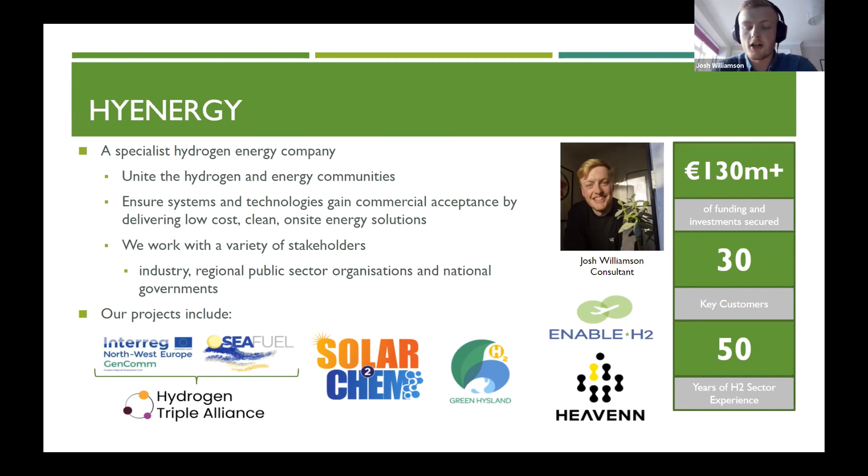So firstly, a little bit about myself and the company. HyEnergy are a hydrogen consultancy specialising in linking the energy community and the hydrogen communities together. We've worked with a large variety of stakeholders, right the way through from SMEs to large industry bodies and national governments too. We've got experience with a number of hydrogen technologies across the value chain, particularly around electrolysis, storage and distribution. Personally, much of my focus is on our collaborative European projects, including various hydrogen production pathways, looking at solar-to-hydrogen, wind-to-hydrogen, etc., as well as hydrogen valley style projects, whether that be HEAVENN and Green Hysland, which we helped to write and design as well. Here's a little bit about our activities - you can look at them later on. I'll share the slides, so if you're interested, you can have a look.

So firstly, looking towards the EU, just to help build the context around the UK's decisions. The EU have been clean energy pioneers for a number of years now. They've helped to deploy a large number of renewables in order to decarbonise the electricity system, and as you can see from that 24% reduction in emissions compared to 1990 levels, they're now looking, instead of an electron focus, towards more of a molecule focus, as they realize that more things need to be decarbonized than just our electricity systems. In the wake of the COVID-19 pandemic, what we've been focusing on really is moving green growth away from electrons and towards hydrogen and other molecules.

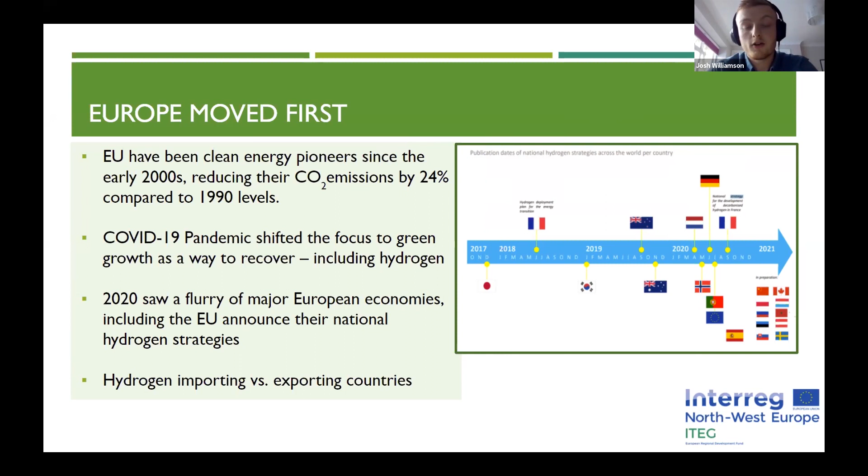The EU saw this as a real opportunity for clean growth, and that's why in 2020 we saw a number of major European economies announcing hydrogen strategies, whether that be hydrogen importing strategies, where their demand outscaled their potential creation of hydrogen, or exporting countries, where their creation exceeded their demand. So where does that leave the UK?

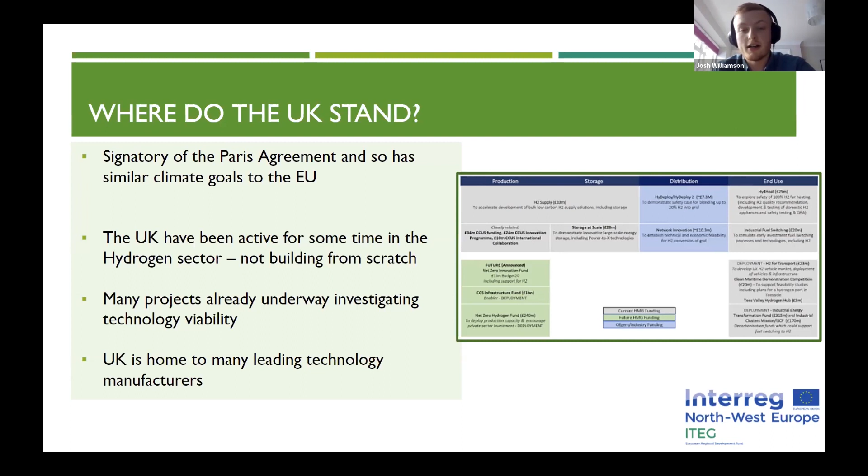Well, the UK are still signatories of the Paris Agreement. They were members of the EU until recently, so naturally the two's climate goals are relatively similarly aligned. And in terms of hydrogen, they're not building from scratch. The UK have had a number of successes in the hydrogen area, and they've got a number of leading technology manufacturers, as well as collaborative projects already underway.

For example, we've got HyDeploy, HyFlyer, and the London fuel cell buses. These are projects that have pioneered hydrogen aviation, hydrogen gas grid blending, and mobility, right the way back to the mid-2000s in the case of the fuel cell buses.

We've got leading technology manufacturers. ITM Power, one of the leading electrolysis companies in the world right now, and they've just opened their Gigafactory, which is the largest production facility in the world for electrolyzers.

Ceres are solid oxide fuel cell manufacturers, and they're the premier name within that, partnering with people like AVL, a global company, to help maintain their position at the front of the line. We've also got a number of sector bodies - three associations that help advise on policy, disseminate knowledge, and create regulations to make the hydrogen market a success in the UK.

So we've got this big picture building within the sector, and the UK is in a good position at the moment. But where does that leave us in terms of formal announcements? We knew the EU were announcing strategies in mid-2020, but we had to wait a little bit, and we haven't quite got our hydrogen strategy yet at this point.

In November 2020, we got the 10-point plan for a green industrial revolution, which came with a range of environmental targets, and it's where the UK have really tried to zero in on their zero emission technologies. It has a number of targets that are key to hydrogen.

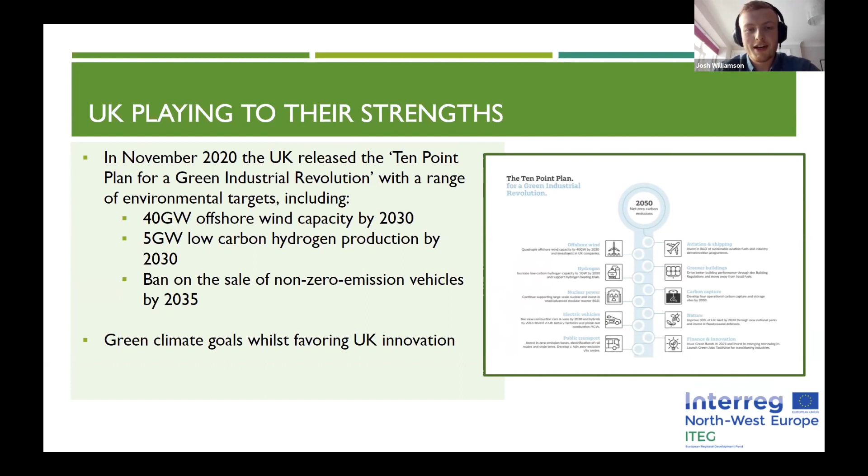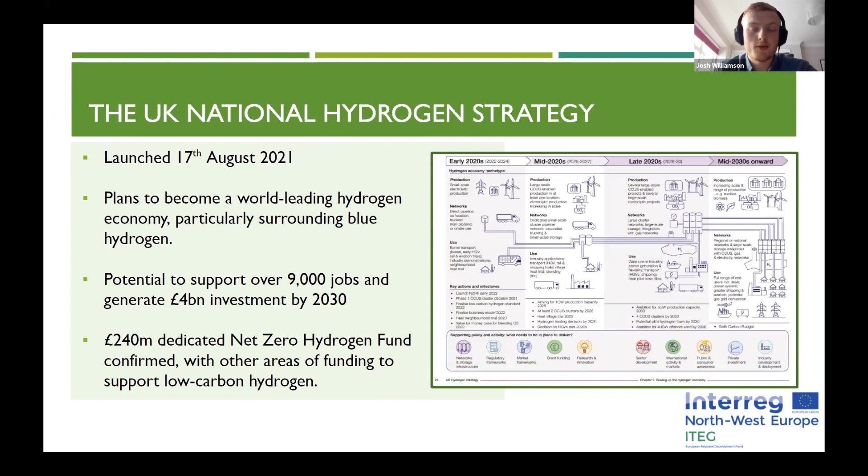Moving on to this year, we were hoping for the swift release of the UK National Hydrogen Strategy, and unfortunately we thought we'd get it in early summer, but we had to wait until August. But beggars can't be choosers. So we got this document which shows a roadmap for the development of a low and zero carbon hydrogen strategy within the UK, and it's split into three main sections.

The first is the role of hydrogen within the UK, which will primarily be used in two areas: to offset the use of natural gas, and to prevent the use of grey hydrogen, changing it for blue or even green. The UK predict this will end up in a 20 to 35% final energy position as we ramp up to 2050, with a large amount of carbon savings too.

Within the strategy, there's still a focus on blue hydrogen production - that is grey hydrogen where the carbon is captured - and the target is still 5 gigawatts, which didn't change from the 10-point plan. And finally, we're still focusing on UK innovation rather than importing.

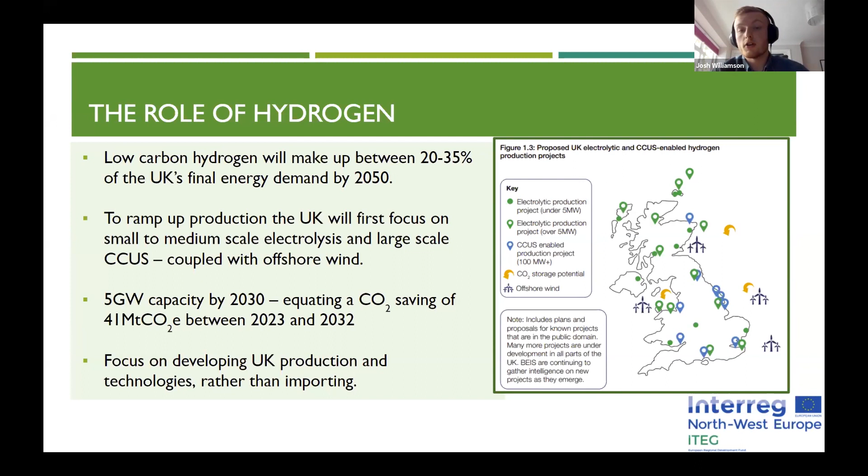There's this position where globally a hydrogen market will open up as this importing-exporting position starts to develop. The UK recognise they're not going to be able to rely on importing solely, so they want to build a strong UK position before potentially exporting their own technologies and expertise overseas into international markets. The second section, which is really pivotal, is the hydrogen value chain. In terms of production, the UK are going to focus on a twin track approach.

That means that blue hydrogen production will take the brunt of this force, at least initially, whilst electrolysis will be seen as suitable for much smaller deployments and isolated areas before it starts to take on a bigger responsibility within the industry as the technology becomes more mature.

Whether it's blue, green, or grey hydrogen, storage and distribution mechanisms are going to be pivotal to deal with this increase in demand and production. We're going to need even greater storage containers that can be manifolded into larger tube trailers, big hydrogen pipelines to transport large amounts of hydrogen from creation centres to demand sites, and even waterbound transportation mechanisms of hydrogen. Industry and heating are going to be replacing grey hydrogen and natural gas, but mobility is also going to be really pivotal in the hydrogen space, particularly HGVs and heavier vehicles, where batteries perhaps don't have as many advantages as their hydrogen alternatives.

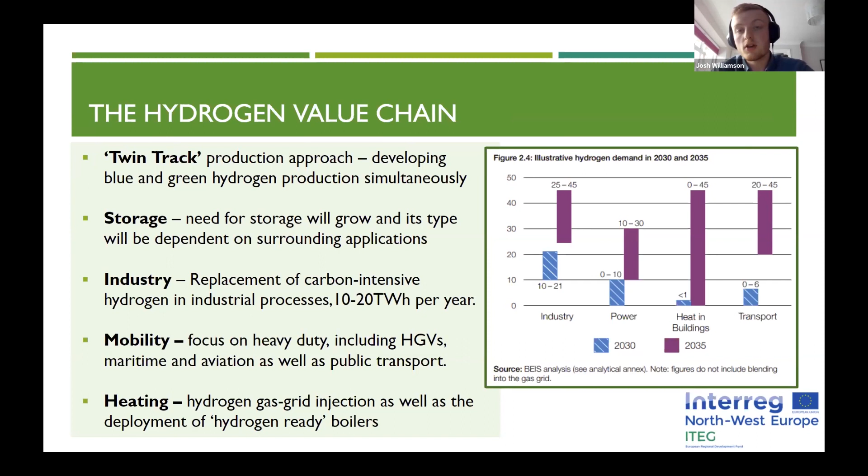The UK have already released a £120 million Zebra scheme to help replace buses with zero emission alternatives, roughly 4,000 buses. So that shows you where the UK are starting to position their mobility sector.

The final area I'm going to talk about from the hydrogen strategy is its value to the UK. In the wake of the COVID-19 pandemic, the UK needs areas for fast growth to help bounce back, and the low carbon economy is predicted to grow up to 4 times faster than the normal economy in the coming years. In terms of hydrogen, that could mean 9,000 jobs by 2030, rising to 100,000 direct jobs by 2050. We're likely to see a lot of that investment within the north of the country, in areas with industrial heartlands that have lacked investment since around the 1970s onwards.

In terms of how that support's going to be managed, there's a £1 billion net zero innovation portfolio, which will come complete with £240 million for a net zero hydrogen fund. There's also £1 billion for carbon capture technologies, and roughly £2 to £3 billion for car manufacturing, exploring their zero emission possibilities.

So that's building this whole picture where these industries will work together to pursue net zero solutions. We're going to have a full systems approach with industry, academia, and stakeholders working together to pioneer British business. And once that British business has matured enough, the UK will look towards its exportation possibilities in terms of expertise and technologies, not in terms of hydrogen export.

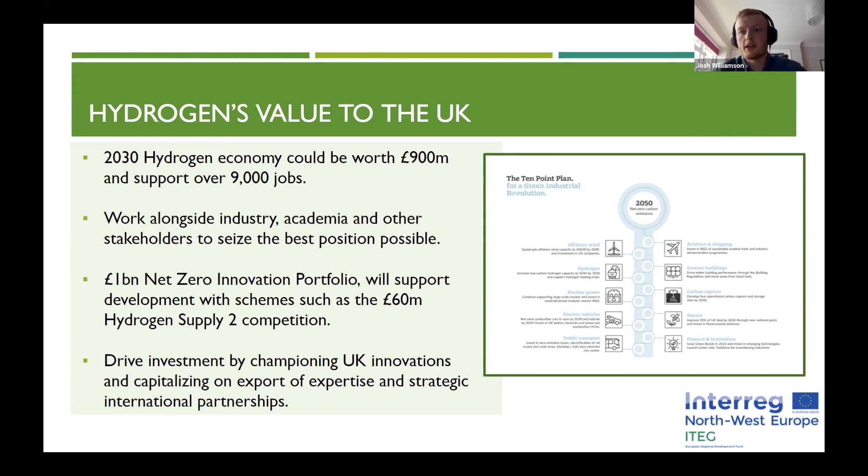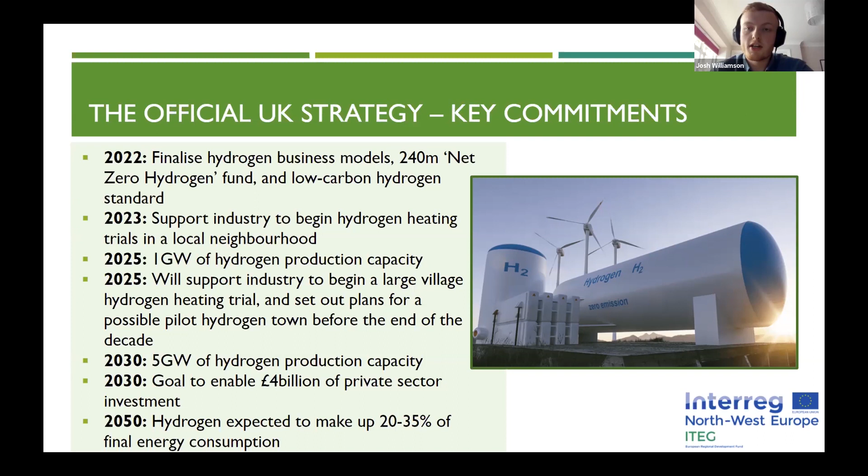So that all boils down to these key commitments. Get it right, and the UK's targets could seem rather minute in comparison to what's really possible for the country. But get it wrong, and the funding will be underutilized, and it could leave the country in a real predicament as to how to achieve their net zero emission goals. But for now, things are looking promising.

The UK have already done the legwork in a number of projects to establish these technologies and start scale-up activities, whether in industrial scenarios such as HyNet in this diagram, or demonstration projects. SGN's H100 is one such demonstration project where they're looking to heat people's homes with hydrogen, as well as their cooking, using 100% hydrogen from a pipeline.

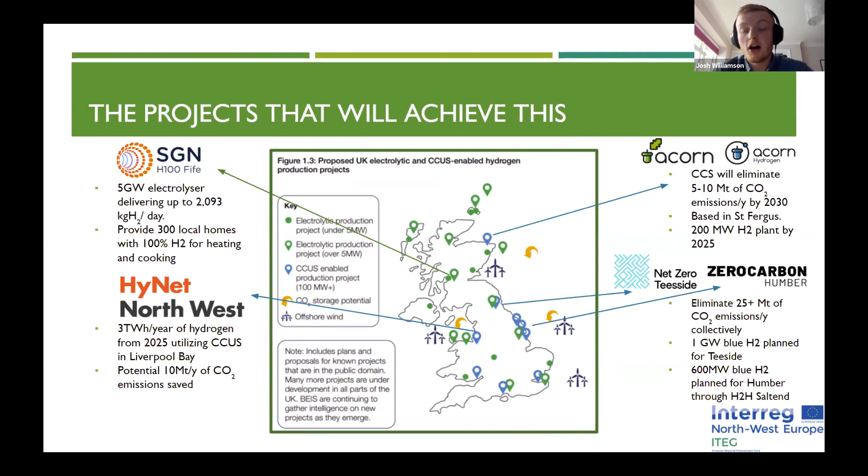These projects can be key not only for overcoming the technical challenges we see, but also for achieving public buy-in. If you ask the average person on the street what they think of hydrogen today, you're likely to still get the answer that it's something to do with being explosive, or the Hindenburg. These projects are really important in overcoming that point of view and achieving a higher penetration in public-facing areas.

So, whilst we're talking about the strategy, we also need to talk about its challenges. That high levelized cost of hydrogen is really the central challenge. A customer isn't going to be willing to pay more than their current grey hydrogen price because it will hamstring their profits, and who's going to want to do that?

What we really need to do, though, is not just take the position that we need to scale up and low carbon hydrogen will come down in price. It's really a mix of all these challenges together, and we need a coordinated set of measures which will tackle all of these in accordance, and that will lead to the central challenge being tackled. Scaling up is part of that challenge, but we need a coordinated set of measures.

In terms of marine for hydrogen, in the national strategy, there's not actually that much mentioned, unfortunately, aside from saying Scotland and Wales are great locations because of their marine potential. So I'm hoping that in the rest of this webinar, it will be a great opportunity for us to hear a little bit about the solutions that the tidal and the marine sector are creating in order to force the government's hand in that area a little bit, as we've seen a lot of support for solar and wind, etc. And it would be great to see the marine and the tidal area do the same.

Just quickly, if you're just getting started with hydrogen or you'd like to talk to some experts based on this presentation, I think that these two resources are a great place to start. The Hydrogen Territories Platform and the Community Hydrogen Forum are great areas where you can talk to these people and explore your potential as a community or a company.

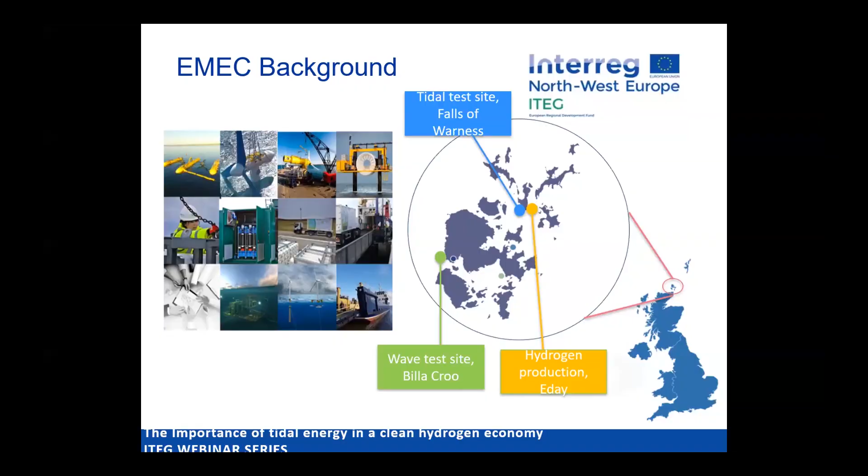So for those of you that don't know about EMEC, EMEC is the European Marine Energy Centre. It was established in 2003 as a not-for-profit business, and we're based in the Orkney Islands, which is get to John O'Groats and keep going. So, based on the north coast of Scotland with an abundance of natural resources such as wind, tidal and wave energy, and you can see there from the map EMEC's test sites.

So in the green is the wave test site, and the blue is where the tidal arrays will be established at the Falls of Warness, just off the island of Eday, where James will talk about the tidal turbine very shortly. And then the hydrogen production site, which is also based on Eday. Over the last 18 years, EMEC have had 34 marine devices deployed from 21 clients from 11 countries. So it's a really broad portfolio, as you can see from the picture there.

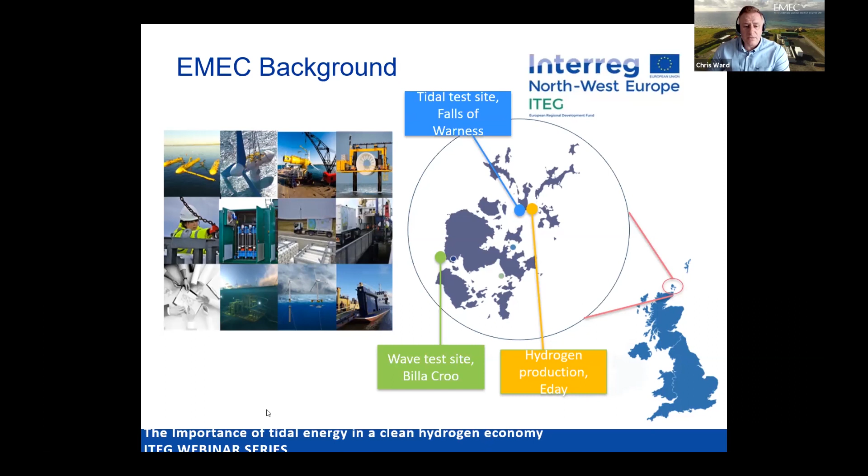So what is the ITEG project? The ITEG project is key to develop and validate an integrated tidal energy and hydrogen production solution for clean energy generation in remote areas, open market opportunities for the ocean energy sector through hydrogen production, optimize an EMS, an energy management system, and fast track a clean energy generation, management and storage solution towards commercialization.

And then our partners are working on building a roadmap to support replication of the integrated solution in other remote and grid restricted areas. So from the diagram there, you can see the Orbital O2 device, which is now deployed at the Falls of Warness EMEC test site on the Orkney Islands, the island of Eday, and then that's connected to the substation, and it will be connected also to an electrolyzer to produce green hydrogen.

And the way that that's stored, we have static storage on site up to 500 kilograms, but then you'll be thinking, how does it get off the islands? Well, we have specific bespoke tube trailers designed to carry hydrogen from and around the islands, and they can carry up to 250 kilograms of hydrogen to then be dispensed into the application that it is required for.

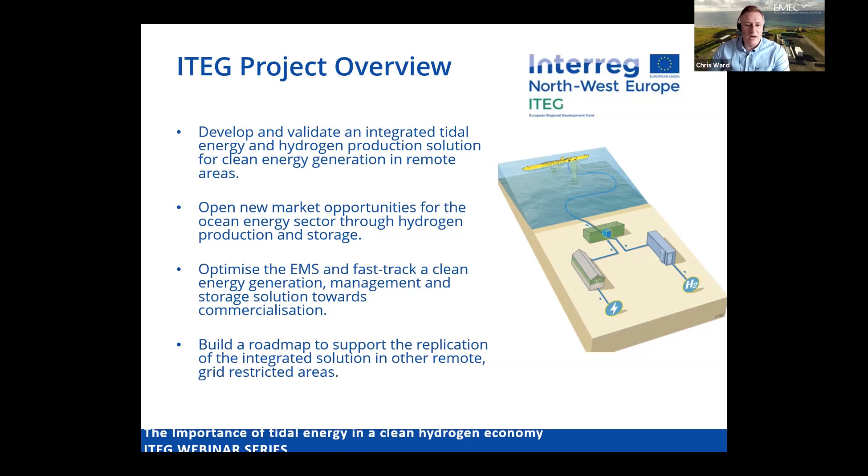And they're also connected to the Eday wind turbine, which is a 900 kilowatt wind turbine, which is also connected to the site as well. With all this information coming through the site, we'll have some great data analytics, be able to power green hydrogen from wind and tidal solutions, and then be able to store the curtailment either as hydrogen, but also in the form of battery as well.

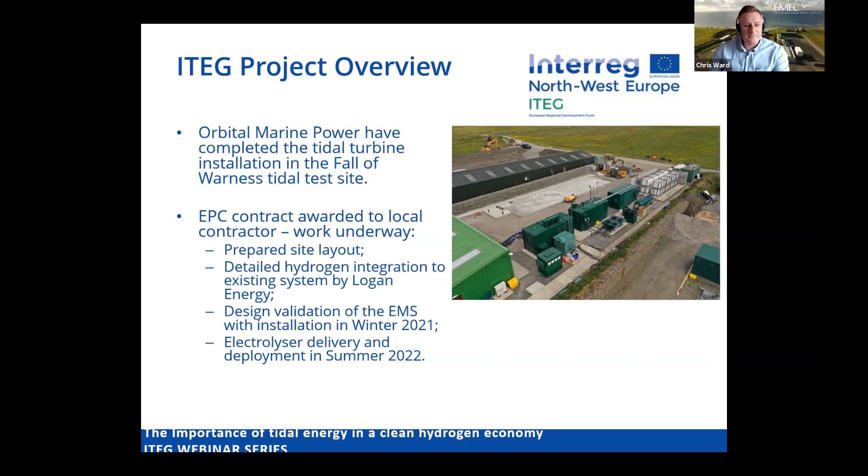As all of us have been affected by COVID-19. Nevertheless, on the ITEG project, all the partners have been working hard behind the scenes, obviously virtually, but also with some of the more challenging aspects, which probably James will allude to later, with regards to the actual physical build of items of equipment. So luckily, we have been able to work through this, but like all of us, everything's just slower, a bit more expensive, and that does hit the project, and we have to plan accordingly to mitigate these circumstances. So we have been suffering supply chain issues, resulting in delayed delivery of some of the project elements.

Obviously, when furloughed staff was an issue, we didn't have the contact and the person power to deliver deliverables on time. And manufacturing environments such as the shipyards had to be a safe working environment due to COVID, which has had to be taken into consideration as well. But we're working through these, and we have got a project extension until December 22.

So a large modification has gone in for the partners. There were no project funds allocated; it was just basically a time extension. So the partners had to work hard to make sure their budgets can align and still deliver the project to the new extension time and on budget as well, which has been very challenging.

And we all have been working remotely for the last 2 years as well. So as much as working online is fine and it's practical and it serves a purpose, it doesn't replace building up relationships with project partners, being able to have those over-the-desk conversations and being able to progress things in different elements, all progressing towards, as Josh alluded to earlier, all the different requirements which we're pushing these projects to achieve.

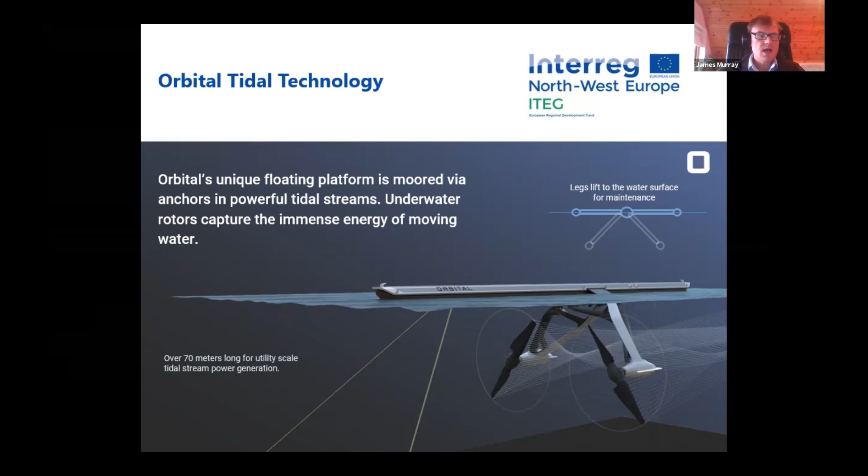So firstly, what is the Orbital tidal technology? It's a unique floating tidal platform, to which two sets of large rotors are mounted, moored in fast flowing tidal currents. We have some unique features to enable low cost installation, maintenance, and access. We've developed this technology over the last 20 years to large scale, utility scale units in excess of 70 meters in length, with installed capacities per unit in excess of 2 megawatts. Really our vision is for developing large-scale farms, large-scale tidal arrays of our technology, depending on the site, upwards of several hundred megawatts of installed capacity per project as the sector grows. So it's really significant amounts of low carbon energy that is our aim, not so much at the small scale, even though the technology can be scaled both ways.

So this is the O2. This is our commercial demonstrator unit that was supported through a number of funding support sources, including the ITEG project. This is the tidal turbine that was installed in Orkney earlier this summer, and will be integrated with the hydrogen plant and the electricity and energy management system that's being developed through the ITEG project.

So the O2 has a number of unique features, and it's really our vision for low-cost tidal stream energy and how that's going to be achieved.

It has an installed capacity of 2 megawatts, with 2 sets of rotors, each 20 meters in diameter, giving an overall swept area of 600 square meters per device. It's the most powerful tidal turbine in the world. Each unit can power enough electricity for about 2,000 UK homes, which is what the unit in Orkney that's been installed will power through its operational lifetime.

It incorporates pitch control for floating tidal energy, a significant upgrade on our previous prototype units. One of the key aims we have for delivering low-cost tidal energy is how do we enable low-cost installation, maintenance, and access.

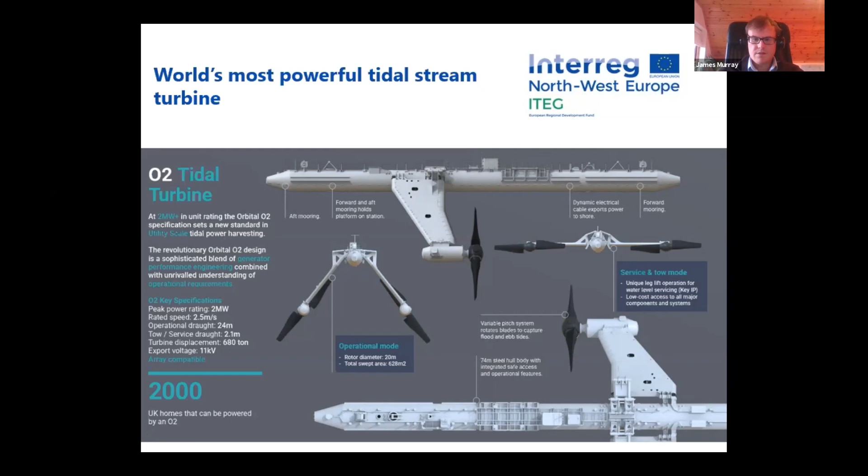So all of the various subsystems, both in the platform of the device and in the powertrains, the gearboxes, generators, all of these kinds of things are highly accessible on site. And again, we carry out all of those operations with low-cost workboat vessels. This is one of the key advantages of our technology, and I'm going to move on to a video now, just kind of demonstrating that.

You can see here that we have hydraulically actuated legs that can bring the nacelles, the pitching hubs, and the blades above the water surface. In this drone shot, you can see the entire floating platform in which all the power conversion and ancillary equipment is installed, and the nacelles themselves, the pitching hubs, and the blades all above the surface.

That really solves one of the conundrums that's been facing tidal stream energy. It's not just how to deliver tidal energy generation, because we can take a lot of analogous technology from the wind sector, but it's how to maintain these systems over a long-term 20-year project lifetime.

You'll see, obviously, it's quite controversial in some ways, the hydrogen economy. We all want to stimulate it in various ways we can, and there's a lot of talk about blue hydrogen, green hydrogen, and grey hydrogen. I just wanted to be pretty transparent about the carbon footprint associated with our tidal technology.

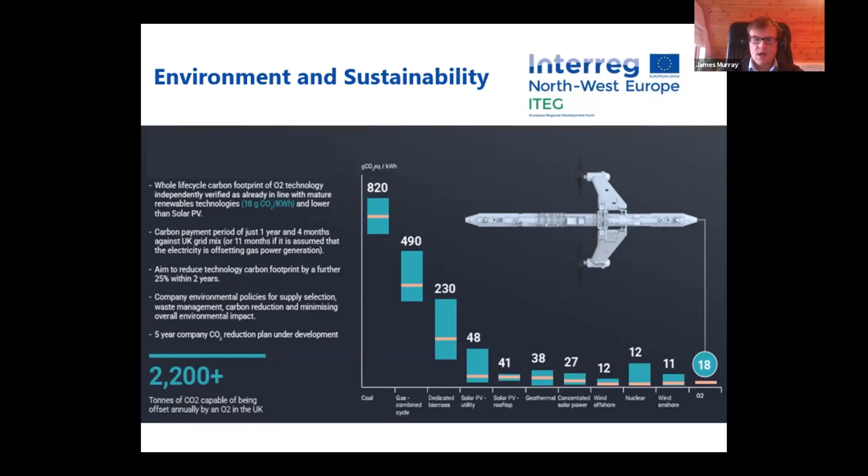Finally, I just want to speak a little bit about, and Chris alluded to a number of these challenges and issues, but also opportunities as well regarding the complementary nature of tidal stream energy and hydrogen production. The first thing to say, and it often gets bandied about, but it's very important and pertinent for hydrogen production.

Tidal energy is a very different form of renewable energy to other more intermittent sources. It is a highly, highly predictable source of energy.

Once we carry out an energy yield assessment for a site, we can comfortably, years in advance, predict what the energy generation is going to be like on any given day, and this goes hand in hand with the seasonality. There's a lack of seasonality associated with tidal energy generation. While there will be times when we're producing more electricity than others, because of spring or neap tides, you can be pretty confident in the electricity you'll be producing at any time. We're also generating at pretty high capacity factors with our O2 tidal technology, in excess of 35%, maybe up to 45% for future units, depending on the site.

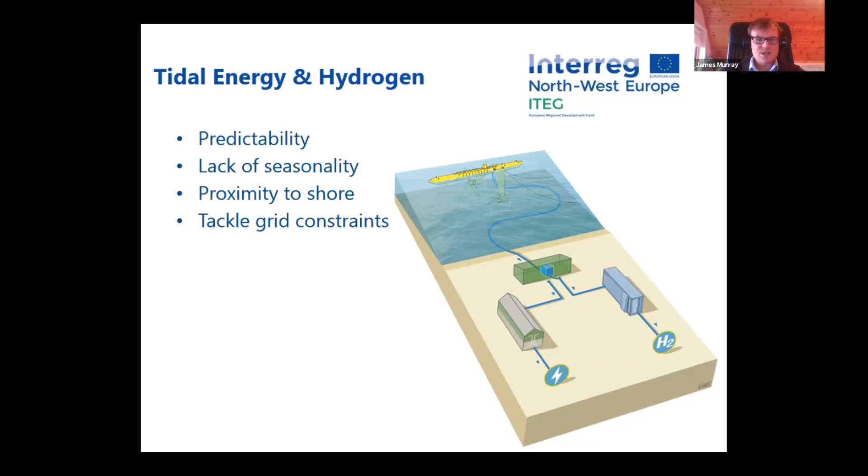Really to demonstrate the complementary nature of tidal stream energy and its generating profile, and look at how we can combine that with hydrogen production and battery storage, to demonstrate a blueprint for an energy system and energy solution of the future.

So yeah, thank you very much, and happy to answer any questions.

That's great, James. Really interesting presentation, and it looks really cool as well, it has to be said. So yeah, quite a lot of questions actually.

What are the main regions where there's strong potential for deployment of this technology? Well, there's been a lot of focus on the Orkney Pentland Firth over the last number of years, because it probably represents two-thirds to three-quarters of the tidal stream capacity in the UK. But there's also very significant resource in Wales, around the Isle of Wight as well. The UK probably possesses about 50% of Europe's tidal capacity, but there's also really good capacity particularly in France, but also the Netherlands and Norway. So really it's the northwest of Europe.

But then further afield, there's really exciting potential, gigawatts of potential right around the world, from North America, both in Canada and the USA, right over to the Far East, South Asia, Philippines, Indonesia, Japan as well. And obviously there might be unique business cases as the costs of tidal energy reduce, as the costs of hydrogen plant reduce, for getting that electricity where it needs to go, where there isn't necessarily a good or well-developed electricity infrastructure in place. So we're very interested in working through the ITEG project and follow-on projects, understanding the business case for how it can help enable both tidal energy and hydrogen production in areas with large tidal resource, which is very global and well distributed, where there isn't necessarily well-developed electricity infrastructure.

Yeah, hi everyone, and thanks for the introduction, Dan. Basically, I'm just going to talk about our HydroWing development, a little bit about our thoughts on installation, O&M, cost reduction, and how we see it going forward.

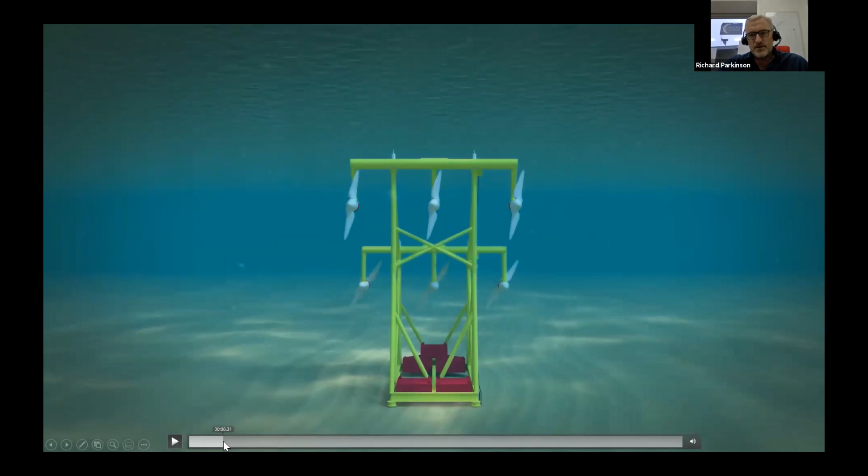Unlike the Orbital device, ours is a subsea mounted device and it uses multiple turbines. I've got a short animation which explains everything better - I'll just make sure the music is turned off. Effectively, we use 6 of the Tocardo T2 turbines on our device. Depending on how we configure it, it's fairly flexible in terms of the configuration of the device.

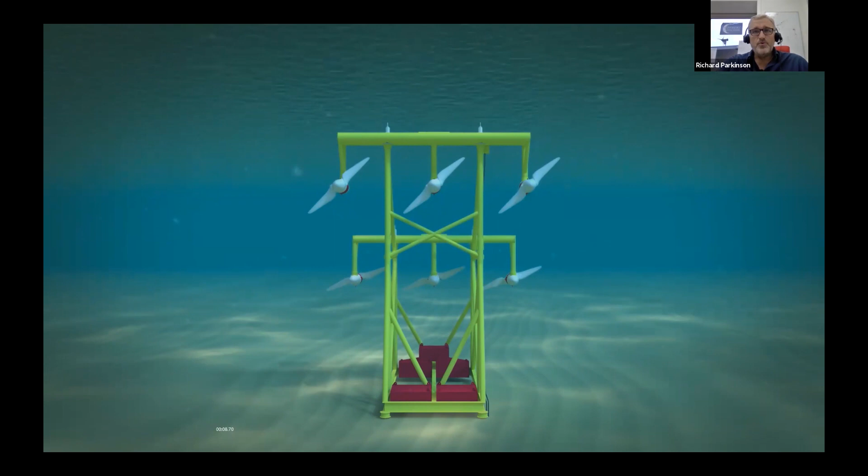These turbines are 250 kilowatts each, and in the future we're looking to use the T3 turbines, which are up to 500 kilowatts each. So ultimately we'll be looking at 1.5 to 3 megawatts of production. At this stage, the turbines are very well proven, and the bits we're trying to prove are the control systems, taking those subsea and developing a robust installation methodology.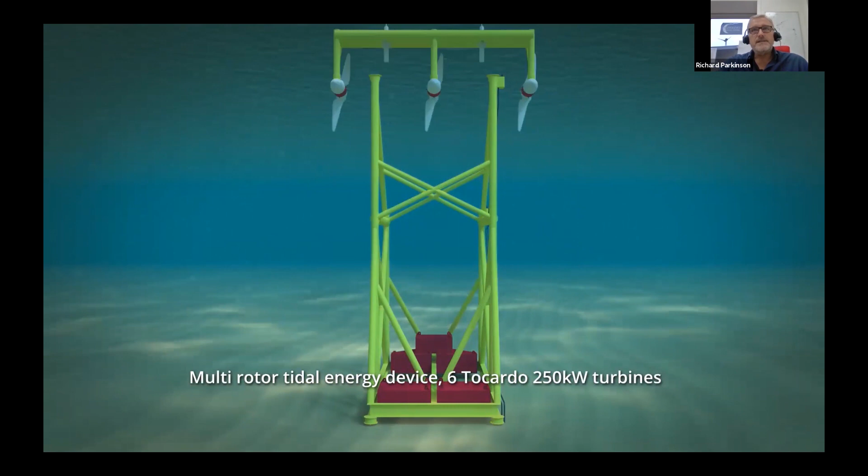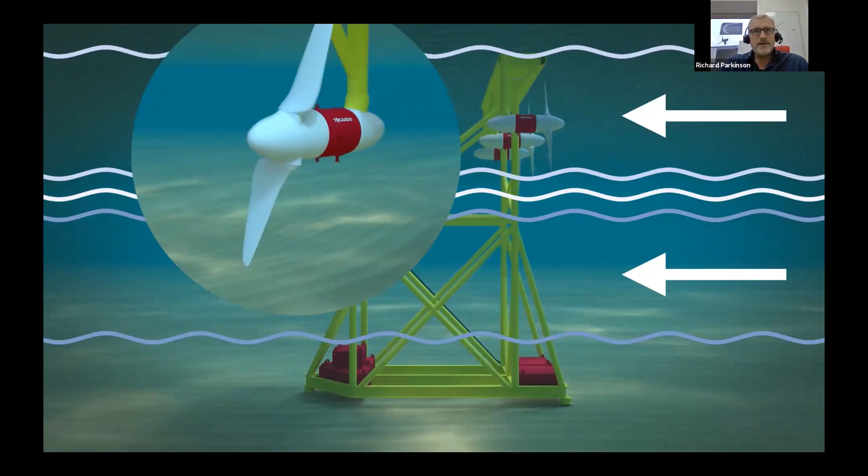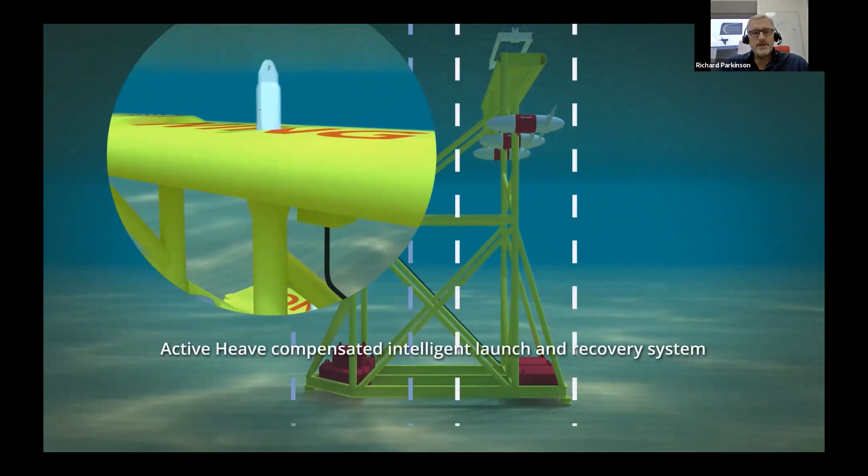The key thing about our technology is that the wings are removable using wet mate connectors, and our patents basically have a flow corridor for ensuring flow. We use the Tocardo bi-blade technology for bidirectionality with fixed pitch - we don't need to use variable pitch. Then obviously lifting corridors so we can recover the turbines to the surface.

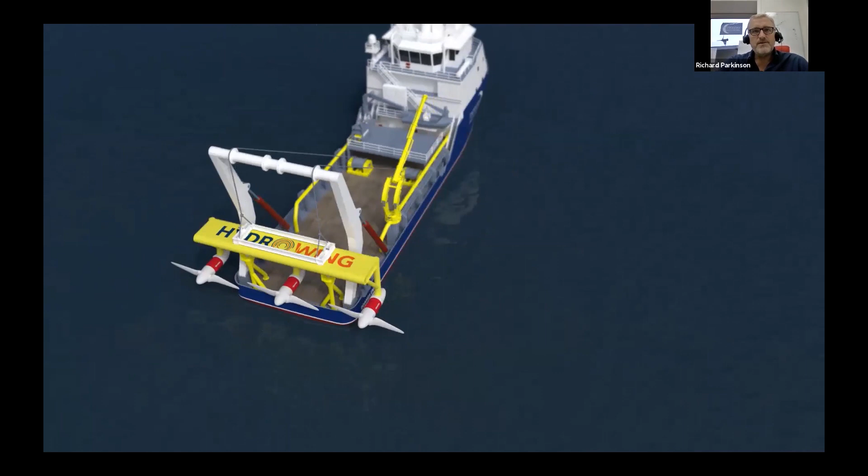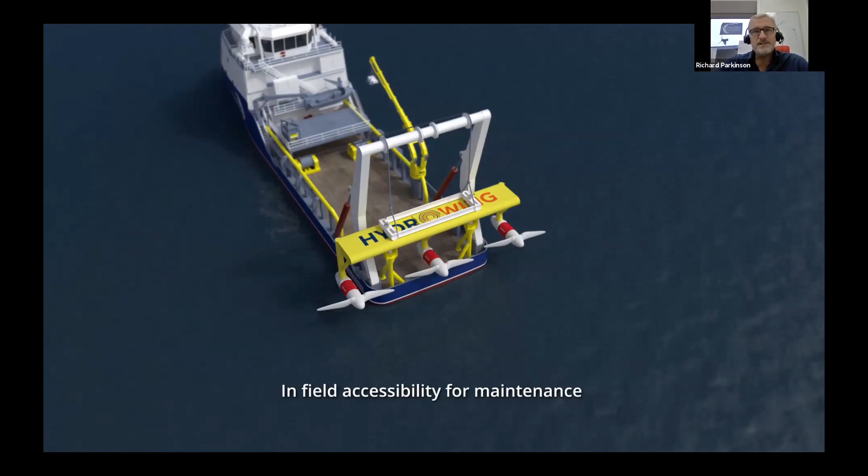We recover it with our own installation vessel, the Nyanga Ensho, which is currently undergoing conversion in order to recover these turbines and launch them. She's a very efficient diesel electric vessel - she only consumes 2 to 3 cubes of fuel a day on DP and on transit, which is less than many of the workboats that go, and her daily OPEX is on a par with most workboats we're using. She's a converted oil and gas vessel with very high maneuverability.

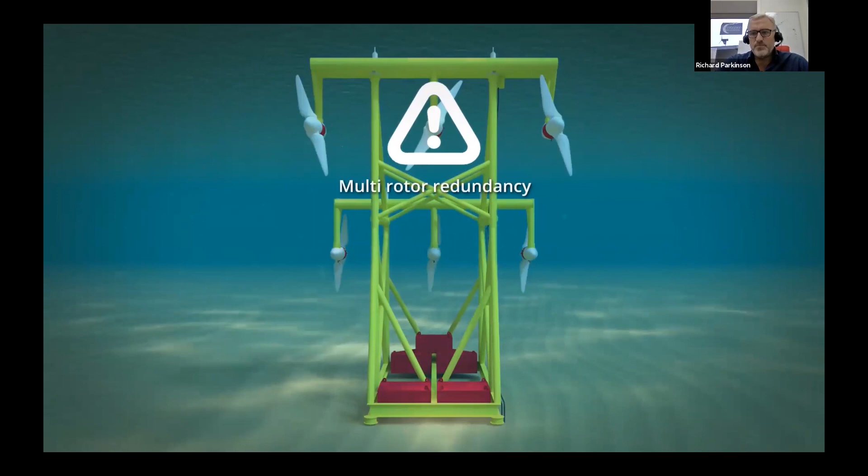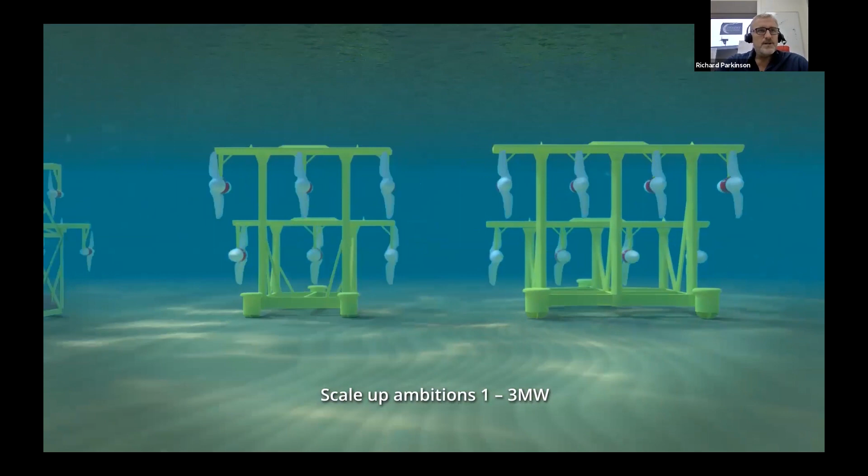Essentially, the installation process takes less than 20 minutes. There's no personnel required on deck during the installation, and it's completely controlled from the bridge. Our scale-up ambition is to use the T3 turbines in the next generation of devices, and to prove it, our first goal is to demonstrate the project, hopefully at EMEC next year, where we're looking to do a demonstrator using 3 of the early stage existing T1 turbines.

Essentially, we have 2 products. We have a double wing device, which is ideally suited to deep water locations, typically more than 30 meters deep, with hub heights at 22 meters and around 14 meters. The advantage of this device is that we can elevate it quite high into the water column, at that optimal height to get a very high yield. Close to the seabed, the yield isn't so good - we can get just above that barrier zone, and also get below the disturbed turbulent water near the surface.

We can also deploy a single wing on a single device for shallower channels, typically sub 20 meters depth, in order to still generate good capacity on a single structure. It's more efficient if we can double it up, but not all locations allow that, and some of the really good high yield locations are much shallower. So we're flexible in terms of how it can be structured, how many turbines we put on.

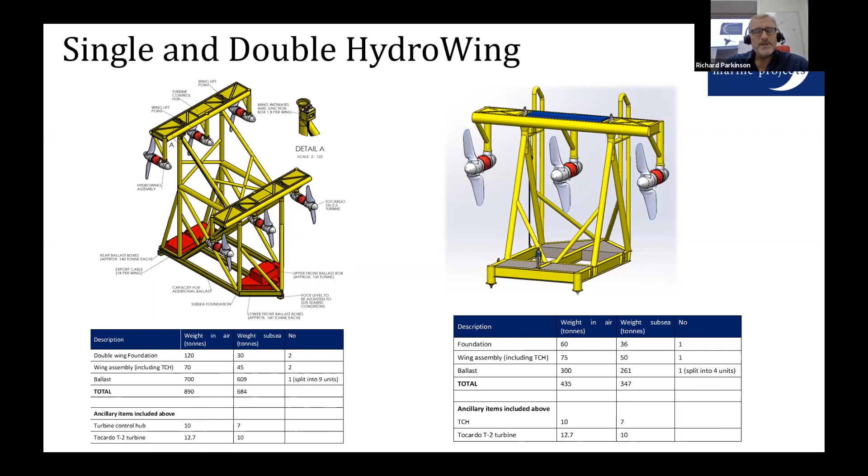Our experience is that very rarely is the issue in the turbines. We've operated the Tocardo OTP project, and it runs day in, day out with very little need for any form of intervention. So we're very, very confident to take these turbines subsea. The key areas we've got to demonstrate are the control hub and the wet mate connectors.

We don't need the ROV for launch and recovery in the HydroWing. It's all controlled from monitors, which are located on the bridge. So the overall cost and the operation cost for recovering the devices is extremely low.

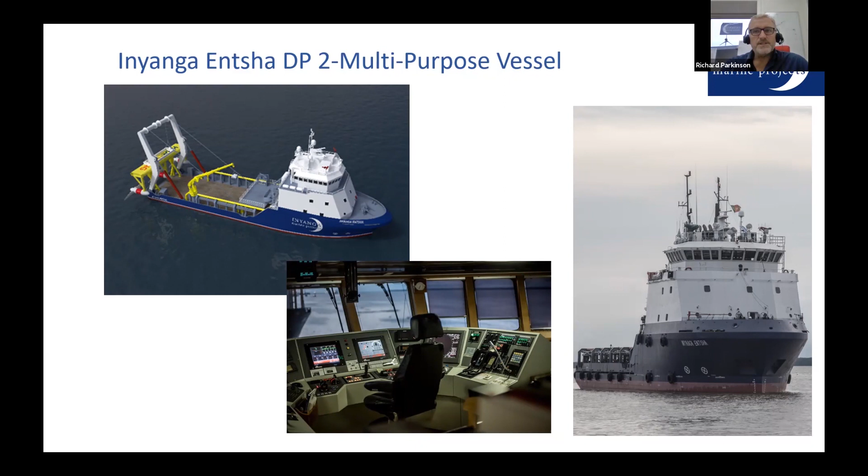We also use the vessel for supporting other projects. We're working with other tidal developers and supporting them, and working on several offshore wind projects at the moment, with a very, very busy schedule for the vessel planned ahead.

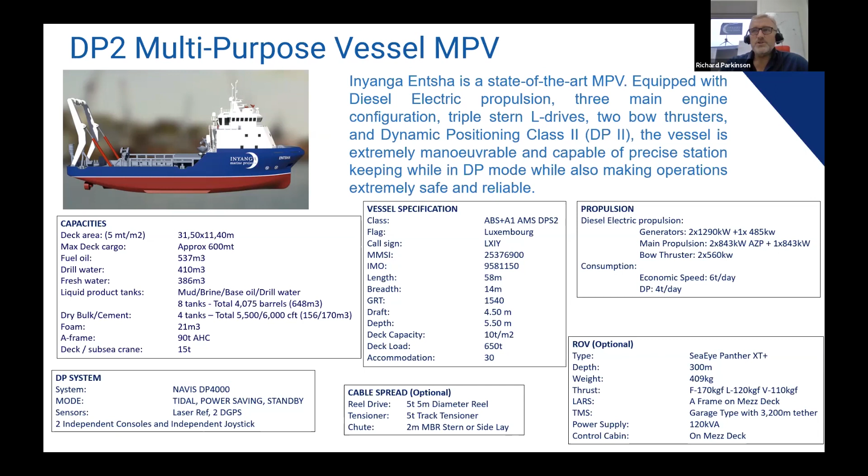There's an overview of the specifications. I think the key things of the modifications we're making are the A-frame and ROV that we're putting on board, and modifying the vessel for a range of operations, all in the renewable offshore sector.

As I mentioned, in terms of our operation and maintenance strategy, our key focus is on having very, very reliable turbines, and Tocardo have probably the most proven and reliable turbines with over 46 running years to date. We currently operate 5 turbines on the OTP project, and they've been running seamlessly without any major problems and without any need for human intervention.

The on-duty engineer can control everything from his phone these days, and I think it's probably 3-4 months since anyone even went down to the site. So they're very efficient at remote operation.

We also can achieve with this system a very, very high packing density. The spacing between the turbines is less than 50 meters, and the wake recovery is very good, again 50 meters down tide. So we can get up to around 275 megawatts of installed capacity per square kilometer, which is very, very important because good tidal sites are limited, and you want to get as much energy extraction from a given site as you can. Good tidal sites are going to become very, very valuable real estate going forward.

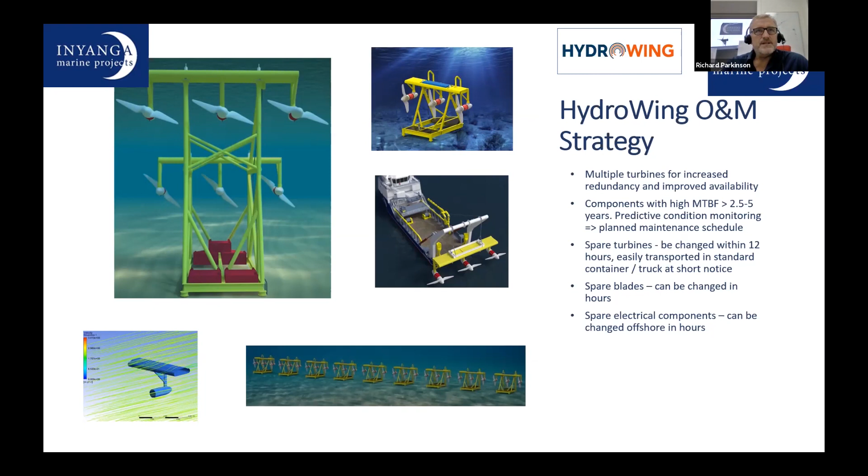The other key aspect is we carry a spare turbine. We have one in our facility in Heerhugowaard in Holland, and that turbine can be mobilized and changed out on a device in less than 12 hours.

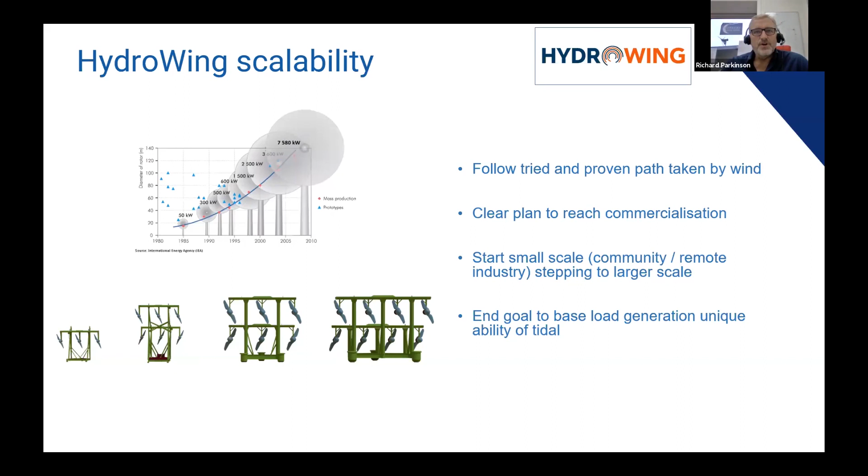HydroWing is scalability. At the moment, we're focusing on going from our T1s to T2s, which are our most proven turbine, and then up to the T3 turbines. We're following a very similar path to offshore wind, where it was the people that started small and gradually evolved that succeeded, as you can see by the pink lines in the top left graph. And we believe tidal will follow a very, very similar curve, and it's a lot cheaper to make the mistakes at small scale and to learn as we expand.

I think the HydroWing has demonstrated in several jobs that we've tendered for that, one, it has very, very low capex and very efficient marine operations, and we eliminate all offshore heavy lifts, and the devices themselves can be packed in a 20-foot container and shipped anywhere in the world. Even our T3 turbines weigh no more than 20 tons.

Offshore maintenance is enabled drastically, so we can reduce downtimes. Manufacturing of small turbines is going to be considerably cheaper. A lot less bespoke, standard parts, and every time we double production, we can reduce our production cost by 15%. I mentioned already reliability, and also the other thing to mention is fatigue in our structure.

Because we're using multi-rotors, we spread the fatigue more evenly through the structure, thereby increasing the life of the structure, whereas most projects are designed for or struggle to achieve a 20-year design life, we see no reason why 30 or even more years can't be achieved.

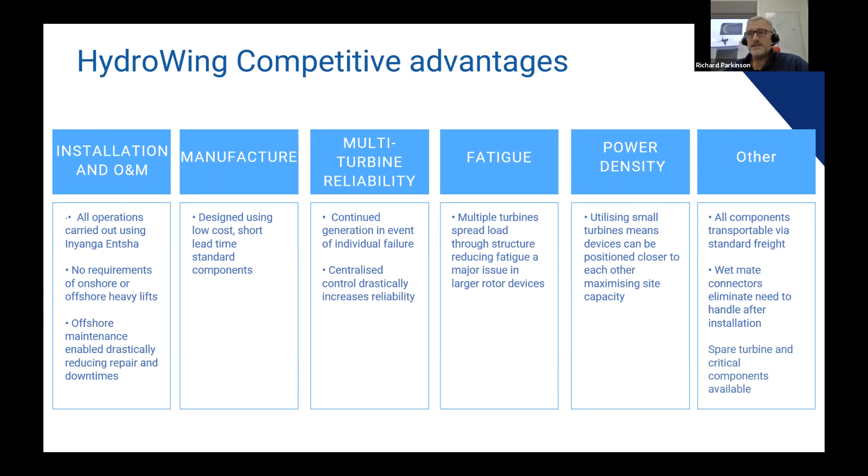And then obviously the power density, utilizing small turbines means we can pack them closer together and extract more energy per given area. As I mentioned, all parts are standard transportable, and we use wet mate connectors, which have had a very, very strong track record and very good high success in connecting and disconnecting the turbines.

When was it? 2 years ago, we acquired Tocardo, along with our partners QED Naval. We both were already collaborating and working together, and felt there was a need for a reliable turbine, and our timing was quite apt in that Tocardo ran into difficulties and allowed us to put in a bid to take over the project. And since then, we've taken over the OTP project, which you can see on the bottom right, which we've been running successfully since February, and this has been gaining steady production throughout.

Tocardo have a very strong track record and a very simple, very robust engineering philosophy, which I was always a very huge fan of. I think anything going subsea needs to be robust, needs to be reliable, and needs to be simple.

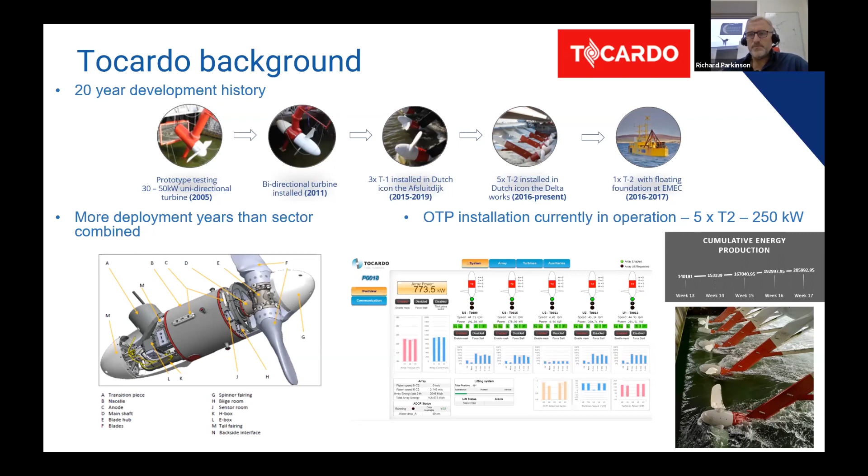Coming over to the subject of hydrogen, it's a subject that's always been very, very dear to my heart. And I've always felt there's a strong need for hydrogen, and I see it as being very essential in particularly marine transportation, particularly around ferries, inter-island, and supporting maritime communities. I've always been very, very impressed with the work that EMEC has done to date.

Having looked at a lot of the sites we could see which would be suitable for either electricity production or hydrogen production, many of these sites are very, very far from population densities or from energy demand. So our philosophy was to come up with a remote system that could be operated, that didn't require any particular balance of plant other than the moorings, and that would produce the hydrogen on board and allow it to be transported remotely via existing vessels in the region. Hence, we developed the THIPSO project.

We got quite far with the development and built up a very, very impressive consortium to develop the project. Unfortunately, we weren't successful in grant funding at the time, so we're reconsidering doing a smaller scale demonstration project, but I think our key focus is on developing turbines and developing our installation and O&M capability in the meantime.

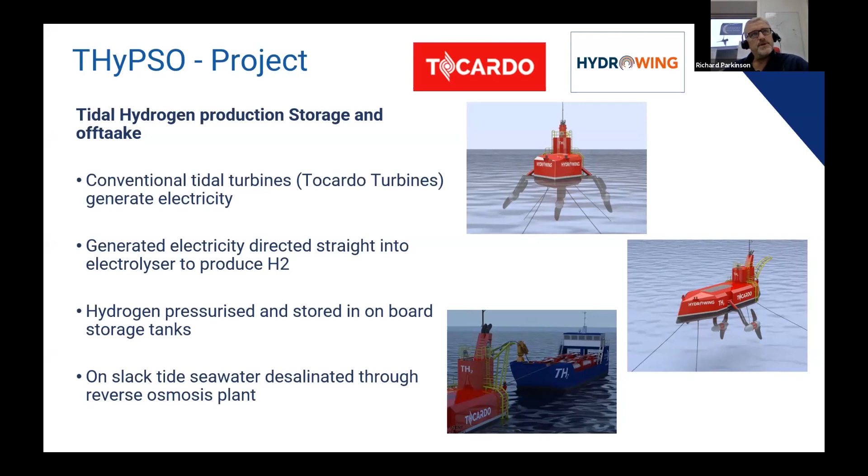The key advantages of this system, I mean, to make hydrogen, you need two things: electricity. Ideally, it should be cheap electricity, and it definitely needs to be green electricity if it's going to be green hydrogen. You need water as well, and seawater is free water. Having said that, most systems now require the water to be desalinated, and this was programmed to be in the vessel.

The system can be autonomous from the grid, so we can deliver the hydrogen directly to a suitable vessel, which may be consuming the hydrogen itself, and can distribute it to the grid, so eliminating distribution issues of the hydrogen, particularly if you're in an island community where the island you're producing it on may not be the island where you want to deliver to or where the customer is. So that solves that problem.

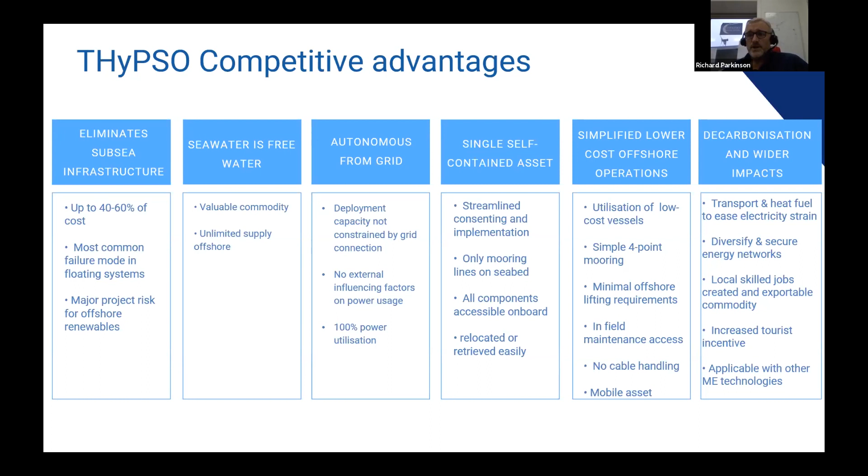It's a single self-contained asset, which means it's easier to finance, and the consenting system is streamlined. There's only mooring lines on the seabed, no requirement for dynamic cables, which are very, very unreliable and very expensive when they go wrong. And we have very simple offshore operations, and these can really help decarbonize remote maritime communities and add wider skills to these regions. So that hopefully gives you an overview.

I think in conclusion, our philosophy and strategy going forward is that we've decoupled our technology from the volatile vessel markets, which is a huge bonus for us because those markets are getting even more volatile in the current situation, and we think pinning our future on that would be very disastrous. Installation and O&M cost strategy we can really develop at scale.

100 megawatts plus per year installation, very, very easy to turn it up and to go very rapidly into large scale production. Eliminating ROVs, everything is remote. We operate with no hands on deck during operation, and we operate with a very small crew rather than having 50 odd people on board when we're doing the operations. We have a robust installation O&M strategy, which is low cost, and we can reduce CapEx massively as well to make it as efficient as possible.

Our strategy going forward to develop projects is to cluster smaller projects together and treat them as one project. We think this is a good approach in order to get that scale that we need, through smaller demonstration projects and using our assets and capabilities in order to develop those projects more rapidly.

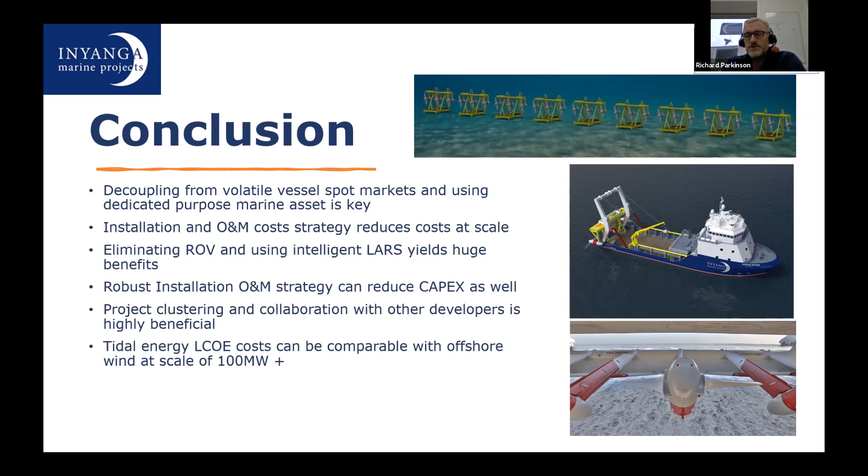We believe that tidal energy LCOE costs can be comparable with offshore wind at a scale of 100 megawatt plus. We don't see any reason why we can't compete with offshore wind. There's no physical constraint. Our capacity factors are similar. It's just a matter of driving the cost down, particularly in terms of the turbine production we see as the main area. In terms of installation, we're already at half the installation cost per megawatt installed of offshore wind using the system I've described to you.

Hopefully that gives you an overview of the potential of tidal energy, not just for electricity production, but also for hydrogen production going forward. You'll find my contacts and also my colleague Diane, who runs our French office, and we'd be happy to answer any questions. Thank you very much. Thanks, Richard.

Really interesting presentation of the full value chain there, all the way from tidal energy production right the way through to innovative hydrogen production, I think. If we can get there. A couple of questions for you. Can you highlight the benefits of a multi-turbine system as opposed to a single turbine system?

Yes, certainly. I think the key thing is manufacturing cost. I think we can massively reduce the manufacturing cost. In order to manufacture at scale, we would envisage a large OEM partner. We're already engaged with a couple of OEMs, and it would be relatively straightforward for them to set up the facilities and to produce the turbines at a very, very low cost. We know already that our turbines are fairly competitive, and it wouldn't take much to get that cost down even further. By mass producing smaller units, we get down the cost curve much quicker. There's a lot less bespoke systems in it.

And then I think the other advantages are logistics. We can ship them around just using a forklift, and we can transport them in standard containers and move them to remote locations. If we're doing a project on the other side of the world, it's not a problem. It's relatively easy to ship the containers, and a lot of the steel work and stuff can be done more locally. So I think those are the key advantages.